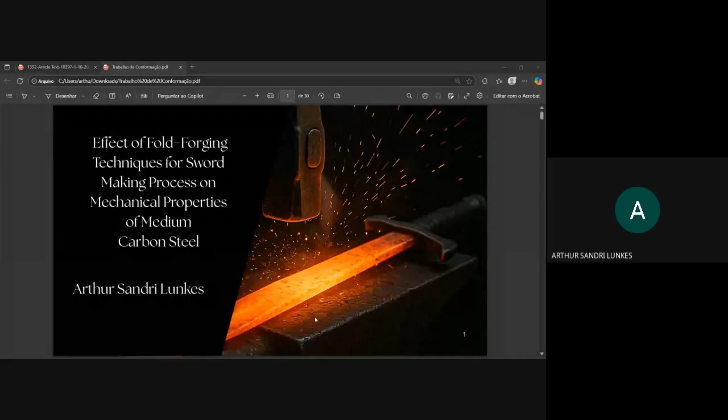So I will start to present my presentation now. I will close my camera and put the slides on Meet. Okay, I think you can see.

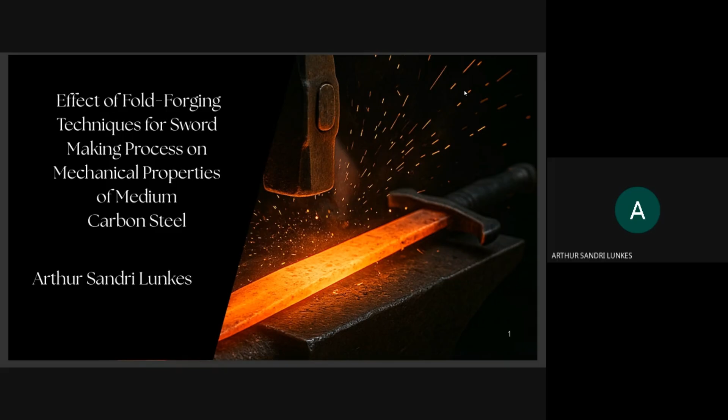So let me start. The title is Effect of Fold Forging Technique for Sword Making Process on Mechanical Properties of Metal Carbon Steel. Okay? So the introduction started talking about the function of swords all around the world, and he said that it's a very, very old tool that humans utilized. The primary materials that swords were made of were bones and stones, and after that the materials utilized were steel, copper, tin, and lead.

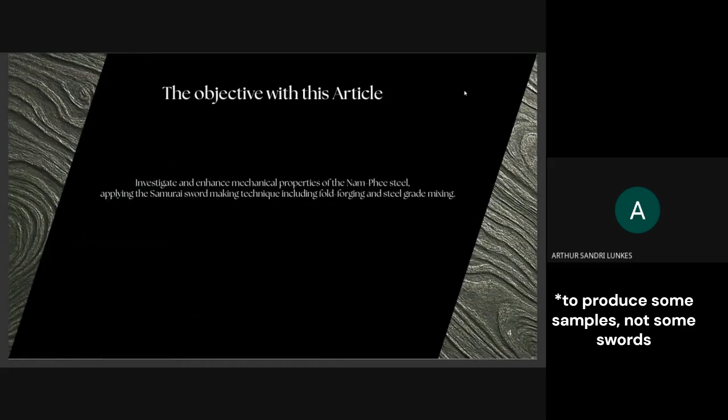The objective of this article is to investigate the mechanical properties of the Nam-Phee steels applying the samurai sword making technique, including the fold forging process and the steel grade mixing. The fold forging process I'll explain in a few seconds. So the steel grade mixing is when you take two or more steels and mix them to produce another that has different mechanical properties.

This article utilizes three different steels: Nam-Phee, the steel grade AISI 1055 and the AISI 1010. So the Nam-Phee steel has a large fluctuation for different areas because the smiths of the old civilizations didn't have standards to create a steel with a standardized and normalized structure. So you have different Nam-Phee steels for different areas. Okay. For this steel, it's common to have an inhomogeneous structure and a low carbon steel. In this picture here, we have the percent of the elements of the Nam-Phee steel that this article utilized.

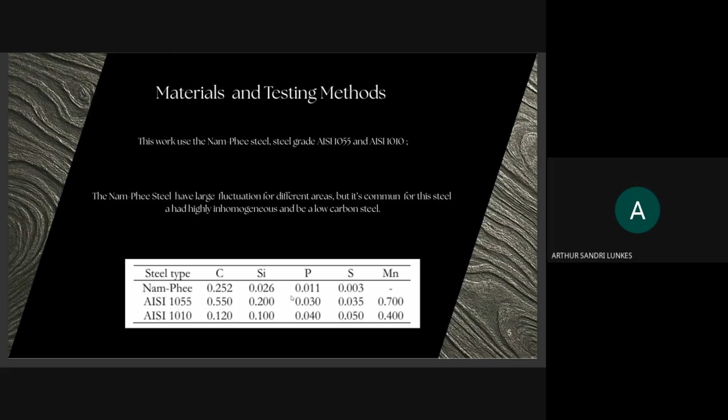So this is the fold forging process the authors utilized in this article. The specimen has the dimensions mentioned here, 60 by 350 by 5 millimeters. The specimen is a plate, and he heated up the specimens to 1,100 Celsius degrees. The authors held it for 10 minutes in a charcoal furnace to decarbonize the structure and forged it with a hammer. Okay, the specimen is divided into two pieces, and they take one and put it on top of the other, then forge it again to become a single piece.

So the three last processes that I said, they repeat 6 times. It's necessary to produce a samurai sword. But the author said that to produce the real technique, you need to repeat it like 10 to 15 times. But the author utilized only 6 because 6 is a number at which you can see the increase of the material properties.

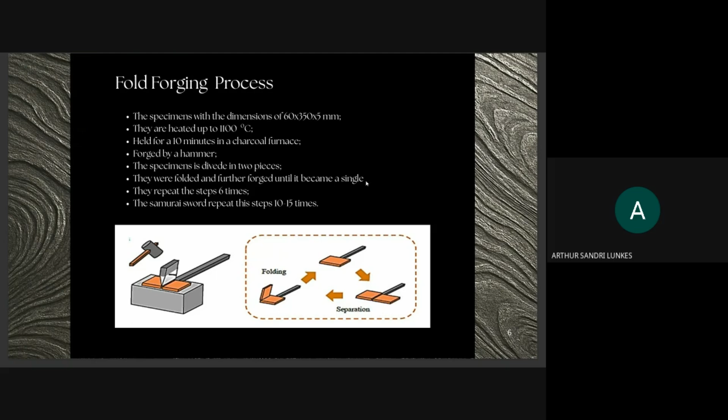The article realizes 4 forging conditions, okay? These four here. The Nam-Phee steel without fold forging and with fold forging, only the steel 1055 with the fold forging process, and the mixing of 1055 steel and 1010 steel with the fold forging process. In the mixed steel, we have the low steel grade in the inner layers, and the high carbon steel in the outer layers.

Okay, so for the quenching process, he heated up the material to 900 Celsius degrees and held it for 5 minutes, and after this he quenched it in water. Okay, in this table here we can see the 4 conditions, and for these 4 conditions he applies the quench process.

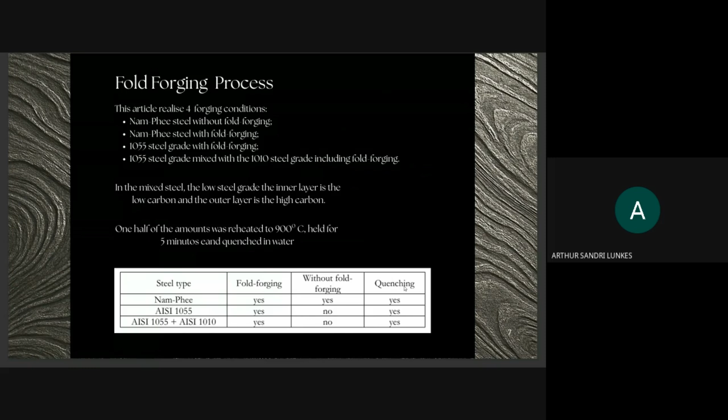In this picture here we can see the process more clearly. The material was heated up to 1100 Celsius degrees for 10 minutes, the fold forging conditions were applied, the material was cooled in air, and after this it was heated up to 900 Celsius degrees for 5 minutes, followed by water quenching.

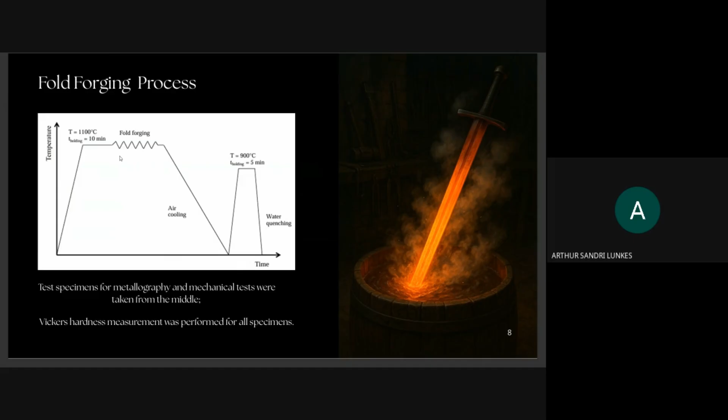So the metallographic samples were taken from the middle of the samples, and the Vickers hardness measurement was performed for all specimens. For the microstructure analysis, he polished the specimens, and after this he heated them up to 150 Celsius degrees for 10 minutes. After this, he polished with sandpaper numbers, all these numbers here, okay?

For the fine polishing, he utilized a 1 micron alumina powder, and the specimens were etched with a 2% nital solution for 5 seconds. So with this process here, he finished the samples, and he utilized an optical microscope to see the microstructure.

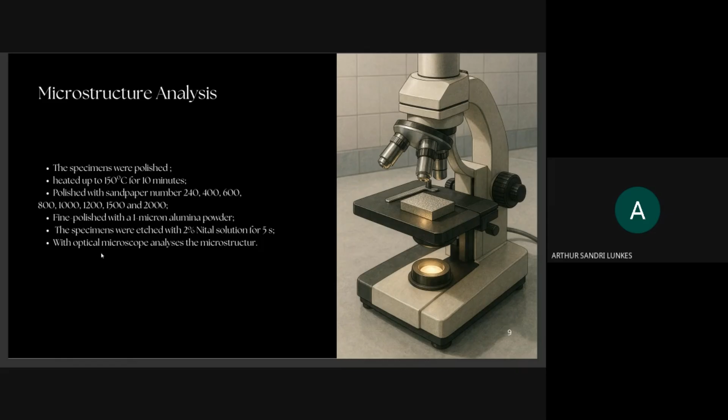The tensile test is according to this standard here, DIN EN 10002. This is the speed that he utilized on the test. And they utilized 5 repeated samples for this test. The objective of this test is the strength and elongation for all the specimens. This picture here is the geometry of the samples.

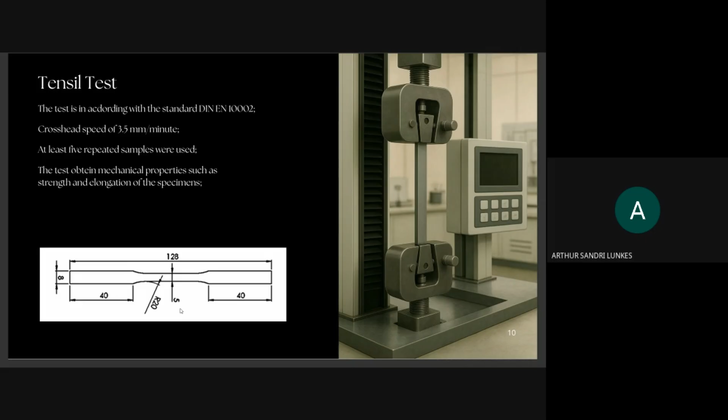For the 3-point bending test, the authors utilized ASTM D790 as the standard. The crosshead speed is this one here. All the specimens were pressed by a punch until fracture occurred. So the test finished when the specimens broke.

And the tests were done on the samples for all forging conditions to evaluate the bendability and flexural strength. So obtaining the bendability and flexural strength is the objective of this test. This picture here represents the geometry of the samples.

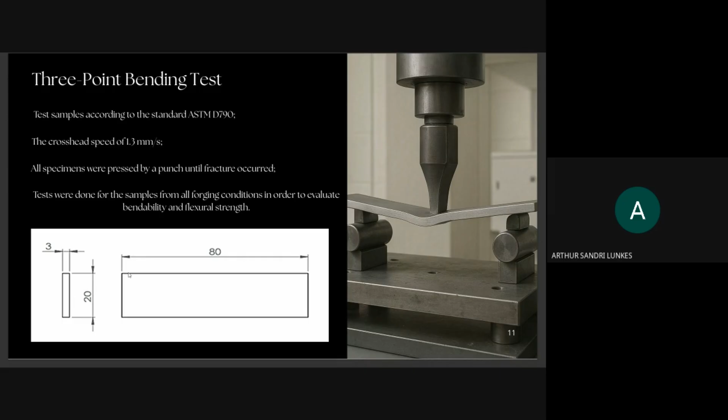The impact test is performed according to this standard here, ASTM E23. The impact tests were performed per sample for all forging conditions, so it will be the same condition for all samples.

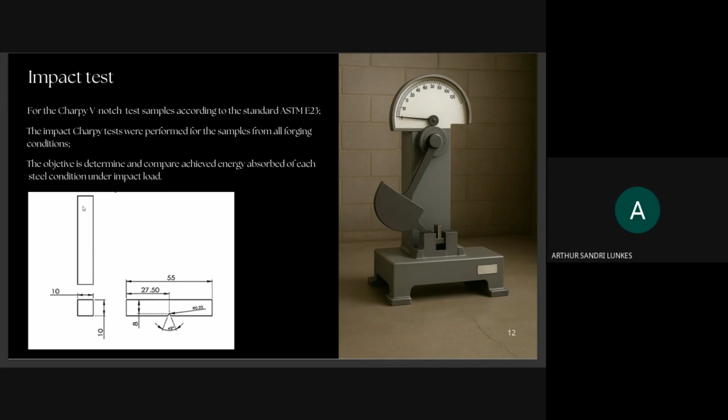The objective of this test is to obtain the steel condition under impact loading and obtain the energy absorbed by the material. This picture here represents the geometry of the samples. It shows the microstructure, this microstructure here.

Now we start talking about the results of the article. This picture here represents the Nam-Phee steel without the fold forging process. Picture A is the forged, and picture B is with the quenching process. So the microstructure here consisted of ferrite phase observed along the grain boundaries, and the pearlite phase appears as a typical lamellar structure. So this one here we have martensite, but this one here we have ferrite and pearlite.

Okay. For the Nam-Phee steel, we have around 26% and 74% ferrite and pearlite phase fraction. I will explain this again in a few slides. So in this picture here, we have the Nam-Phee steel with the fold forging process. This one here is only forged, and here we have the quenched process.

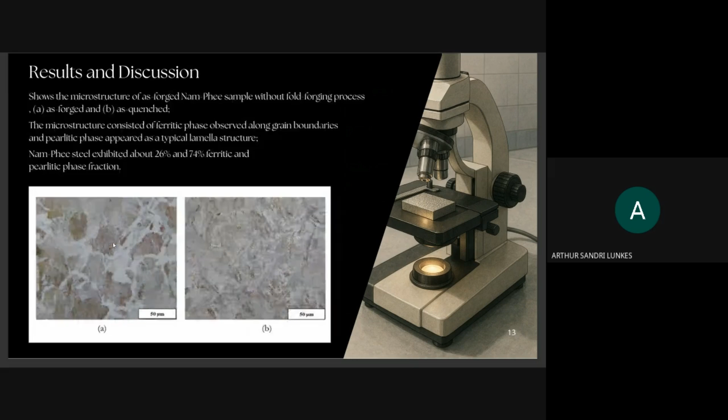For this process here, the fold forging process applied to the Nam-Phee steel is decarburizing. So for this reason the sample here has less pearlite than this one here. Okay. The fold forging could simply lead to a much finer microstructure and a more homogeneous carbon distribution. So if we compare this one here to this one here, it is more homogeneous than the other because of the fold forging process.

This picture here is the microstructure of the 1055 steel and 1010 steel. This one here is only forged, and this one here is quenched. Okay. The microstructure was taken from the middle of the area of the high carbon steel. The microstructure contains a high amount of pearlite and a small fraction of ferrite. Maybe because in the high carbon steel we have more carbon, so we have more pearlite in consequence.

So the microstructure contains a high amount of pearlite and a small fraction of ferrite along the grain boundaries, like I talked about before. The carbon in steel grade 1055 was higher than in the Nam-Phee steel. He said that this steel here has a higher percent of carbon than the Nam-Phee steel.

This result here is the mixed steel too, but he took this picture here from between the high carbon here and the low carbon here. So it's the transition area. Okay. This picture A is only forged, and this picture here is quenched.

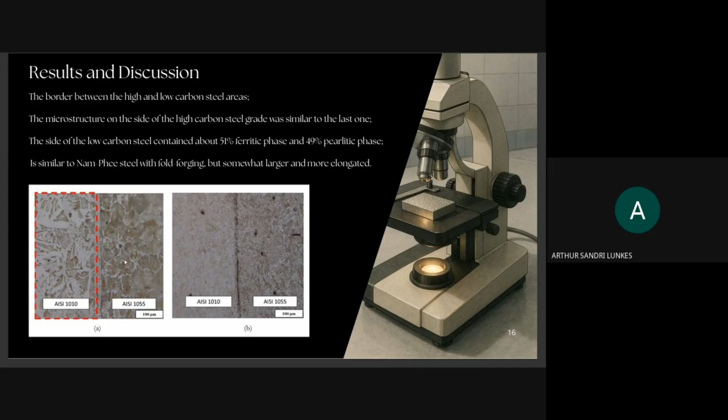Okay. So for the low carbon steel, we have 21% ferrite, 51% of ferrite, and 49% of pearlite phase. This picture here is similar to this picture with high carbon steel here, and this one here. It's very similar to the last one, because here is mixed, with this side here being AISI 1055, and this picture here is the high carbon steel, so it's very similar. Maybe it's very difficult to see because the zoom for this picture is different.

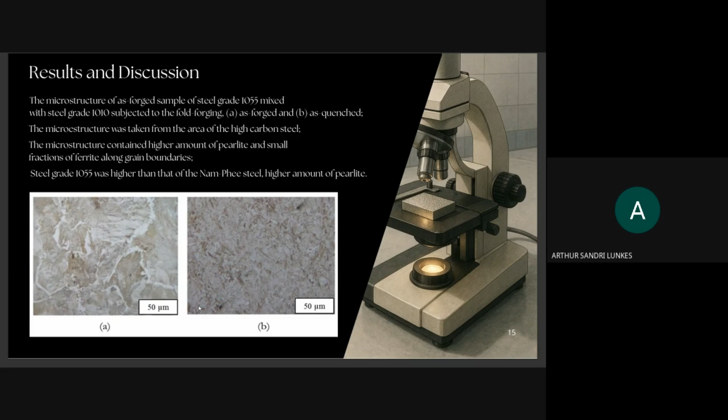So now he has taken the phases for the steels and put them on a graph. Now we can see the phases for this picture here. So we can see that the NP steel without forging process has more pearlite than the one with fold forging. We can see the process of fold forging decarburizing the structure, so it lost a few percent of carbon. That's the reason the NP steel with fold forging has less pearlite than the first one here.

The highest pearlite structure is the 1055 steel with fold forging. It's okay because it has a higher percent of carbon. It's interesting. And I think that's it. Now we have ferrite and martensite, so it's for the quenched process. This one here is only forged, and this one here is the quenched process.

Okay. So the authors didn't find a fully martensite mixture, but the highest percent of martensite is the 1055 steel, maybe because it has more pearlite than the others and more carbon. So the martensite phase fractions in NP steel samples were higher than in low carbon steels. So this one here, the NP steel was higher than the low carbon steel here. You may obtain more martensite structure.

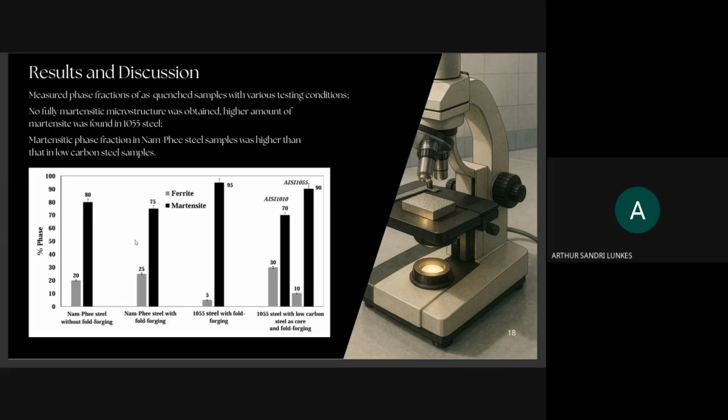Okay, let me see. Now the next test is the hardness. HRC was performed on each sample using an indent force around 100 kilograms. It's the force used on this test. The hardness of the 1055 steel sample is high because of the large carbon content. So this steel here obtained the highest hardness.

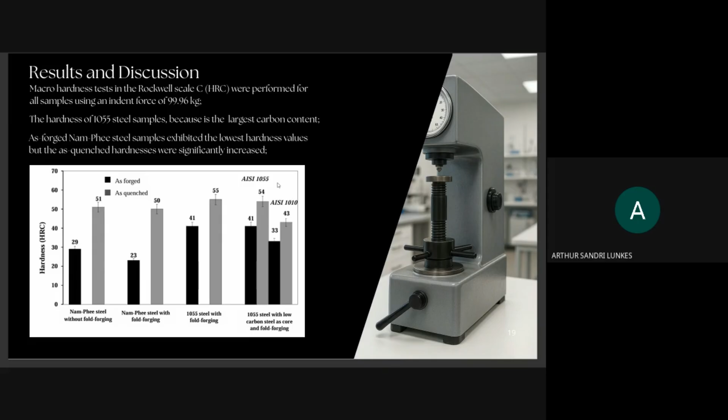And you can see the quenched process will improve the hardness for the NP steel, both without fold forging and with fold forging, increasing the hardness of the material. And the NP steel with only forging has the lowest value for the hardness.

The high amount of pearlite and martensite basically led to increased hardness of the forged and quenched samples respectively. And the 1055 steel is suited to be used for the sharp edge of the sword. It's utilized for this part of the sword because it has more hardness. Okay. I think that's it for this test.

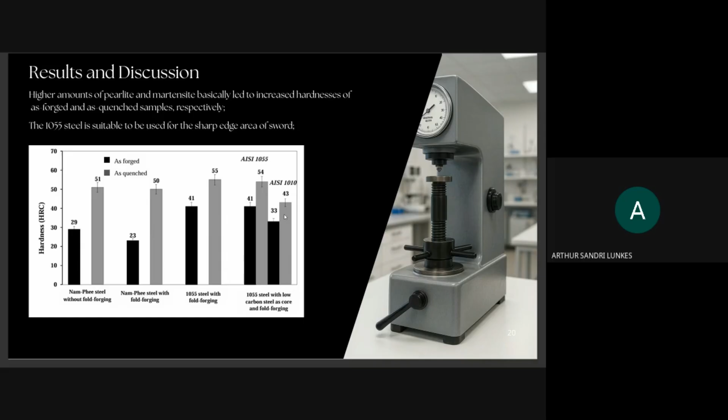Now the authors performed the tensile test. So we can see in this picture here they only have three, because the steel 1055 sample was so hard that slipping occurred during the tensile test, and the fracture took place outside of the gauge length. So this problem occurred during the test, so he couldn't finish the test for this sample.

But for these three here, the NP sample without forging exhibits not only the lower strength but the lower elongation. You can see this line here. With the mixed 1010 steel and 1055 steel, we obtain the highest ductility, and with the NP steel with fold forging, we obtain the highest tensile stress. All the samples reached fracture in the region of the more brittle high carbon steel.

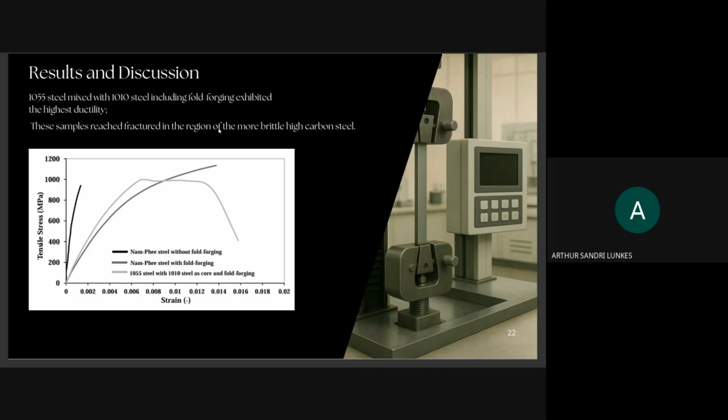So I think it's this. The reason for the AISI 1055 obtaining the maximum tensile stress is that it's in accordance with the hardness value and martensite phase fraction.

So now we have the results and discussion for the three-point bending test. The values were averaged for three repeat samples, and now we can see on the graphic that the Nam-Phee steel without forging process and the 1055 steel with fold forging are very similar. They have the lowest flexural stress and the lowest flexural strain. These two tests here.

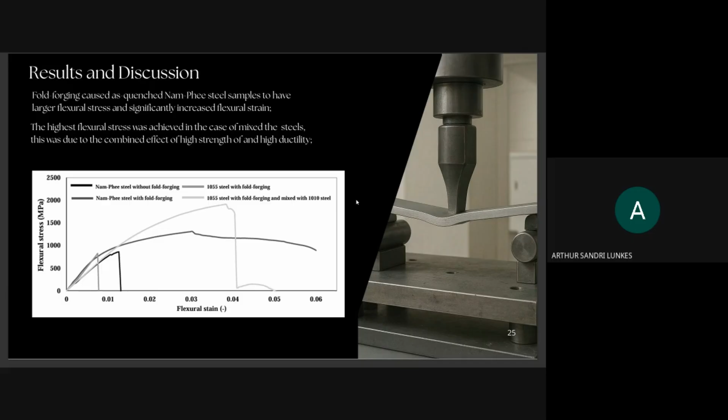So we could see that the fold forging process increased a lot the flexural strain of the structure. This one here is the Nam-Phee without the process, and this is the strain the authors obtained with the process. It multiplied the flexural strain by around six times. So I think that's it for this test.

This test here is the same, but he took from the bibliography the values for the flexural modulus, okay? So he put them on the graphic. The results for the bending test correlate with those from the tensile test. So this test here has a relation with the tensile test.

The bending of the Nam-Phee steel could be increased by the folding process. So we could see that the Nam-Phee steel improves with the fold forging process, which improves the max flexural stress. In the last slide I said it improves the strain, but it also improves the maximum flexural stress. So utilizing the mixing of ductile steel grades is also considered to provide high bending of the sword, maybe because they have these results here for this test.

The high carbon steel exhibits higher flexural modulus values than the Nam-Phee steel. So we could see that the max flexural stress for the Nam-Phee steel is higher than the 1055, but the flexural modulus is highest for the high carbon steel. Maybe the flexural modulus is not the only property that provides a max flexural stress. So this property here is not the only property that increases the maximum flexural stress. Okay, you have other properties that provide the material a maximum flexural stress. This property has a relationship, but it's not the only one.

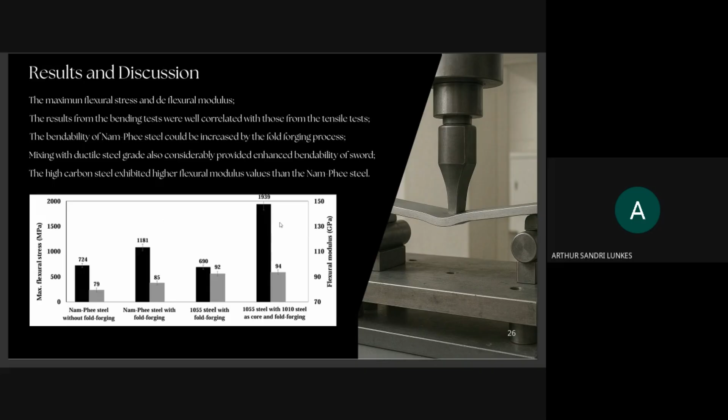Now he takes the results for the impact energy. He utilized a Charpy test for this, with the same conditions for all tests. Okay, the Nam-Phee steel without fold forging process and the 1055 steel obtained the lowest impact energy, as we could see on the graphic. We obtained 7 for the without forging and 4 for the fold forging. And the Nam-Phee steel with fold forging process and the 1055 and 1010 steels obtained the highest values.

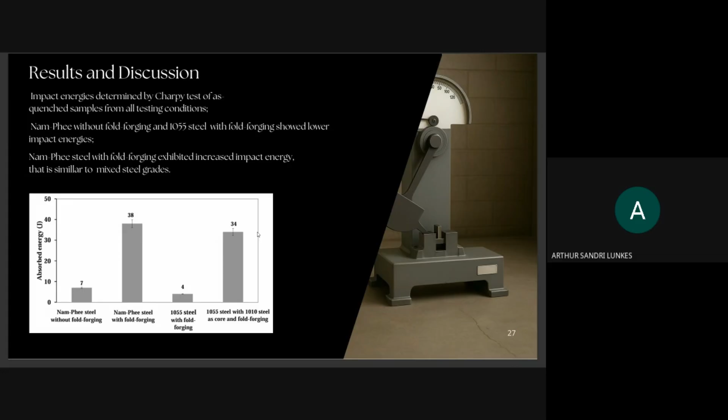Okay. And now the conclusions of the article. The fold forging process leads to Nam-Phee steel with a more homogeneous and fine mixture. We could see this in the pictures I explained before for the microstructure, that this process made the structure more homogeneous and finer. The fold forging process improved the tensile stress, the flexural stress, the flexural strain, and the impact energy of the Nam-Phee steel. We could see this in all the graphics I told you about before. Okay.

For the steel mixing, the method improves the ductility of the steel and improves the high stress for the steel too. It only obtains an improvement in bending and impact energy for the mixing steel. The tensile stress of the Tamahagane steel of the samurai could be achieved by applying the fold forging process to the Nam-Phee steel. We could see this in the results of the tensile test, this graphic here. Let me see this graphic here. The Tamahagane steel maximum tensile stress is close to the Nam-Phee with fold forging process.